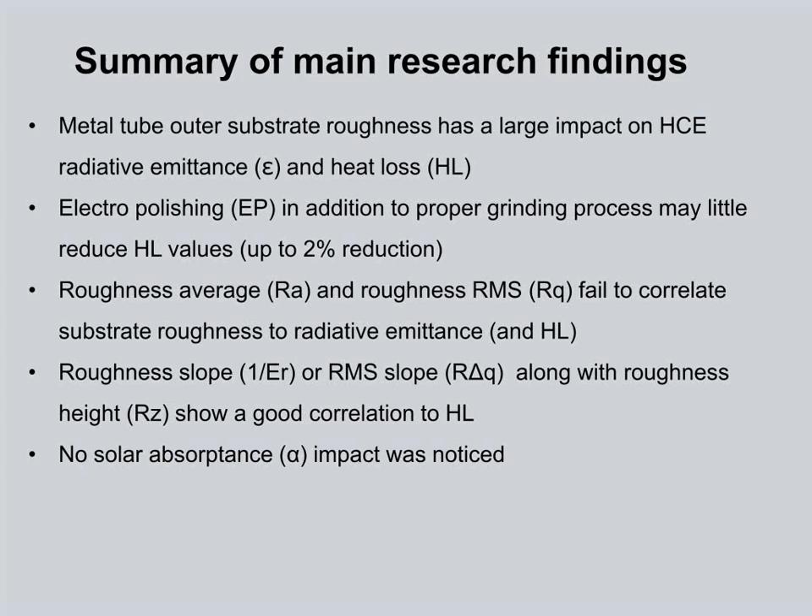Let's try to answer why this research is important. The heat loss from a typical heat collector element is about 10% of the total annual solar heat absorbed at working temperature of 400 degrees C. The heat loss of an HCE with substrate roughness lower than 0.2 micron may vary between tubes up to 10%.

Controlling the substrate roughness based on this study may reduce heat loss by 10% and therefore LCOE up to 1%. All the above findings are more important for higher operating temperatures.

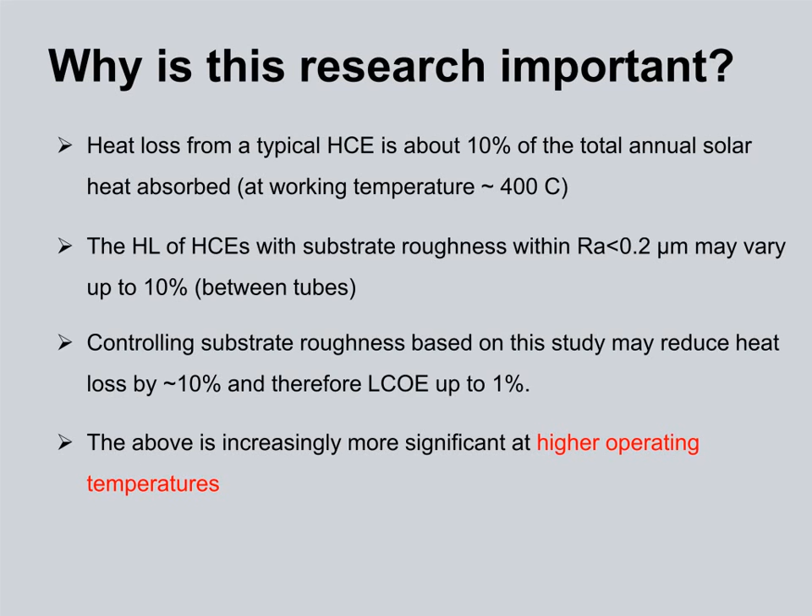Let's have a look at HCE production flow and our experiment method. First, the mechanical grinding of the outer surface of all tubes. Then we introduce an optional electropolishing process. Then the selective coating, the sputtering process, and then the final assembly and vacuum sealing of all tubes.

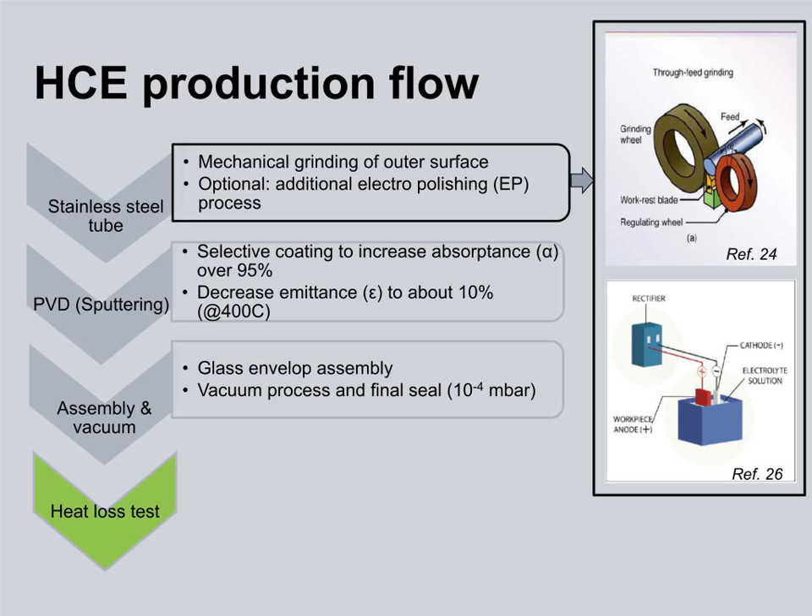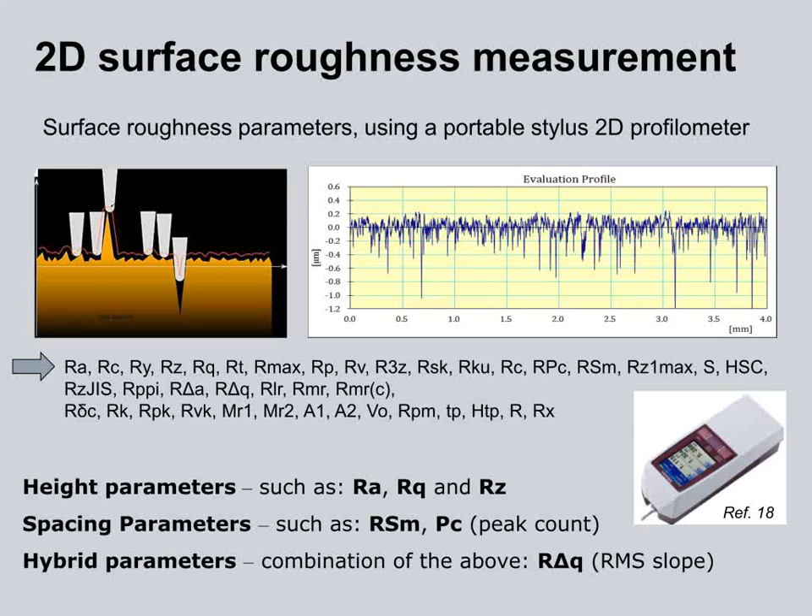Each roughness profile was recorded from every measurement, and also over 30 parameters, as you can see, were recorded from each measurement. The parameters are usually divided into three main groups: the height parameters, such as Ra, Rq, and Rz, the spacing parameters, such as RSm, and the hybrid parameters, which are the combination of the above two, such as R delta q.

The heat loss measurement is a common test used by HCE manufacturers. It basically measures the electrical power needed to maintain the tube at 400 degrees C in our case. We use a single test bench located in an indoor laboratory that has a repeatability of ±1.5%. A schematic diagram of our lab setup is presented.

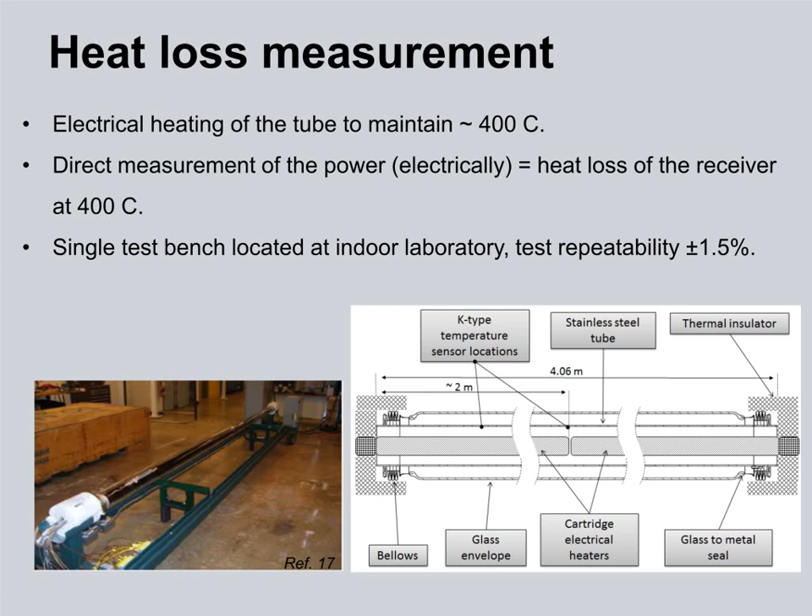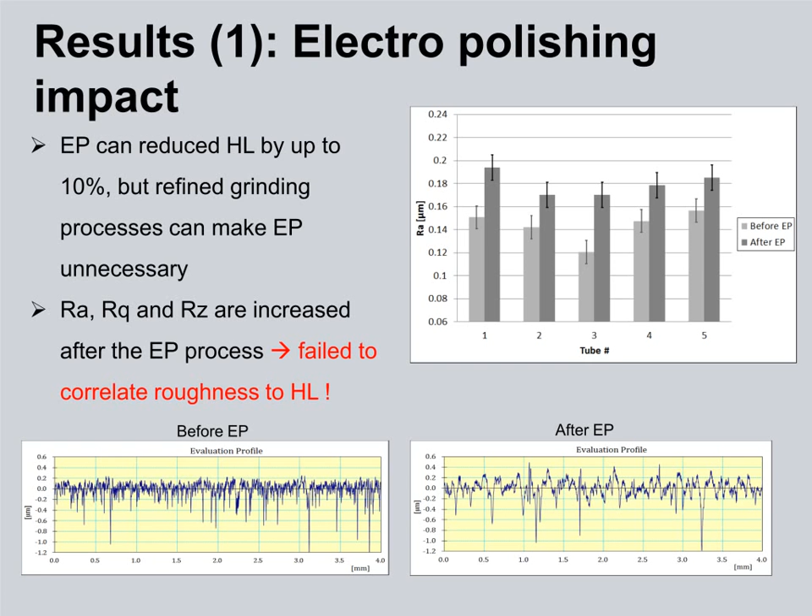Results. The electropolishing process may reduce heat loss by up to 10%, but we found that a refined grinding process can make the electropolishing process unnecessary. The height parameters Ra, Rq, and Rz are increased after the electropolishing process and therefore fail to correlate roughness to heat loss. In fact, the Ra is increased by 25%, as you can see in the graph presented.

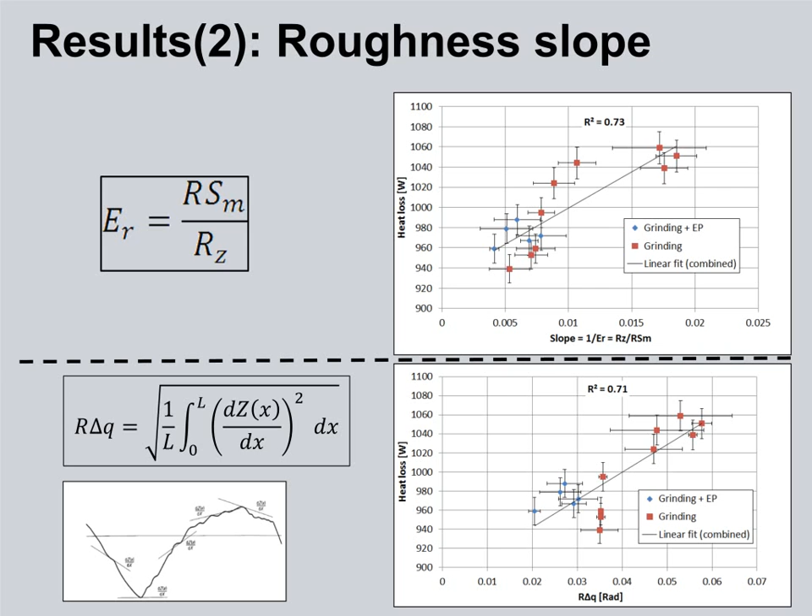The roughness slope, however, presented by 1/ER or R delta q, is decreased after the electropolishing process. Both parameters show good correlation to heat loss as presented in the following graphs. Since both ER and R delta q are dimensionless parameters, they cannot represent roughness alone. Therefore, Rz is provided in addition to them.

Surprisingly, R delta q and 1/ER are very well linearly correlated. R delta q is a more stable parameter, therefore it is more recommended to be used.

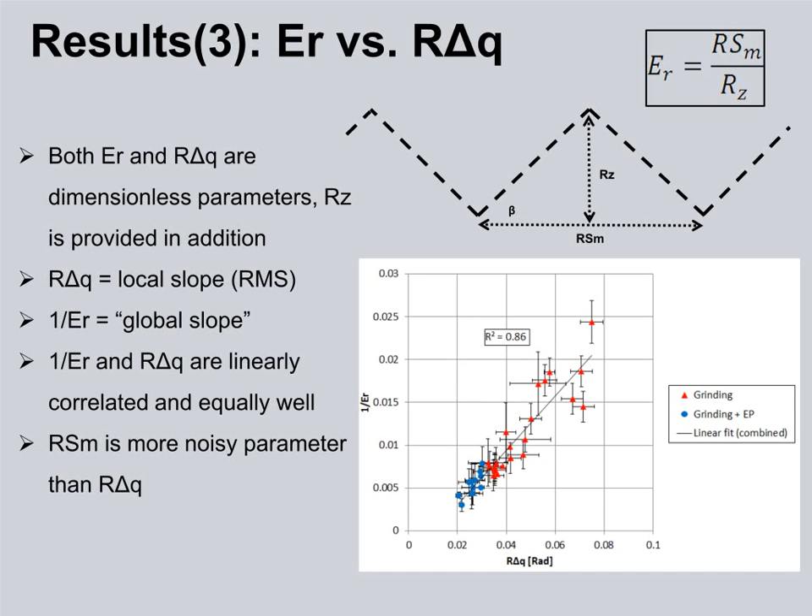To summarize our talk, substrate roughness can be measured adequately by a 2D stylus portable profilometer. Roughness slope 1/ER or R delta q, along with roughness height Rz, show good correlation to heat loss for both cases, grinded only and grinded and electropolished tubes. Proper grinding process makes the electropolishing process unnecessary.

No impact on solar absorbance, up to 1% improvement on total annual heat gain and accordingly lower LCOE. Larger impact on higher operating temperature is expected.